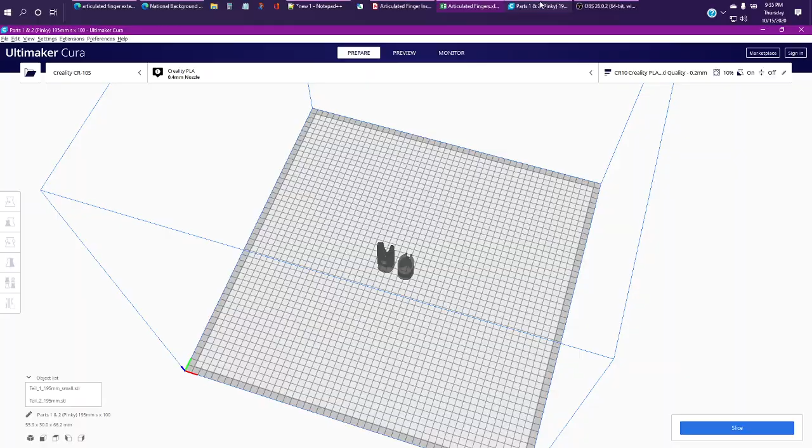Like I said, you're going to have to measure yours to get it to the right size, but otherwise that's it. Now, as far as making the pieces shorter, originally I was thinking you could just grab the z-axis and reduce it, but the problem is you see this angle right here — you need that for your parts to fit together.

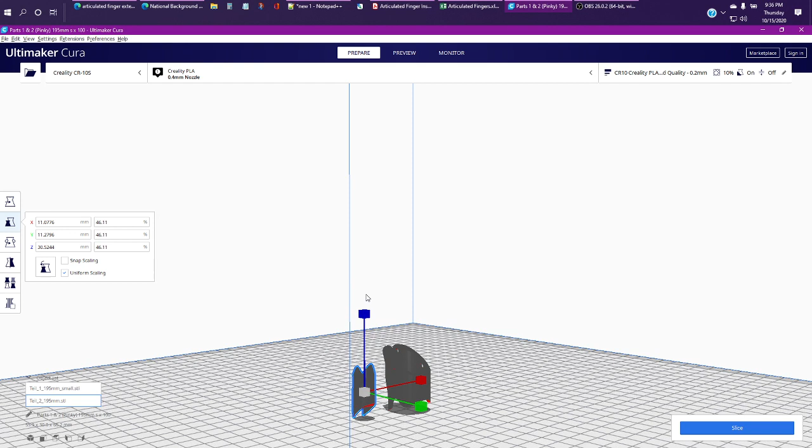If you take the z-axis scaling — oh, this is scaling, sorry — if I just take the z-axis and reduce it, then it changes that angle, and it also changes the holes on it as well. So you don't really want to do that.

So what I figured out was this: if you take the parts and import them into a 3D modeling program, and split them a certain way, you should be able to reduce the length of the fingers. So what I'm going to use here is Tinkercad.

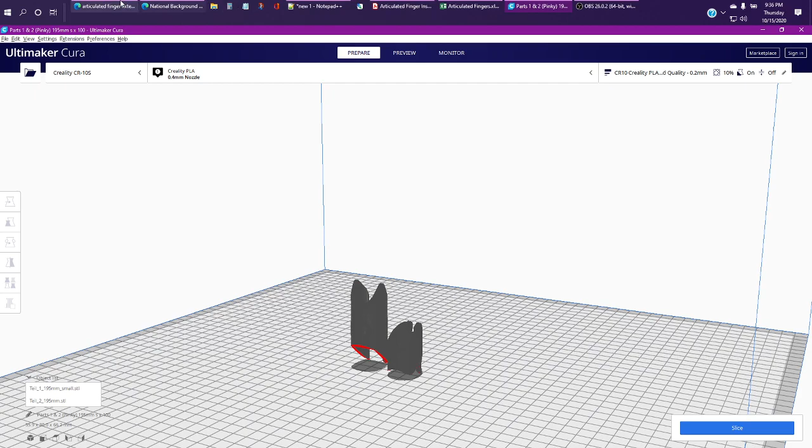And you can see I've already got part 2, part 3, which I'll tell you why I have that in there, and lever 2 in here. I'm going to go ahead and import.

So once you create your free account in here, you can just do drawings, and I'm going to go ahead and import the model file. I'm going to choose a file, and then go to parts 1 and 2, and import part 1. I'm just going to use the 215 for part 1. Doesn't really matter - it's whatever size you determine you need in order to make it shorter or whatever. Then I'm going to hit import, and it's going to bring it onto the work plane.

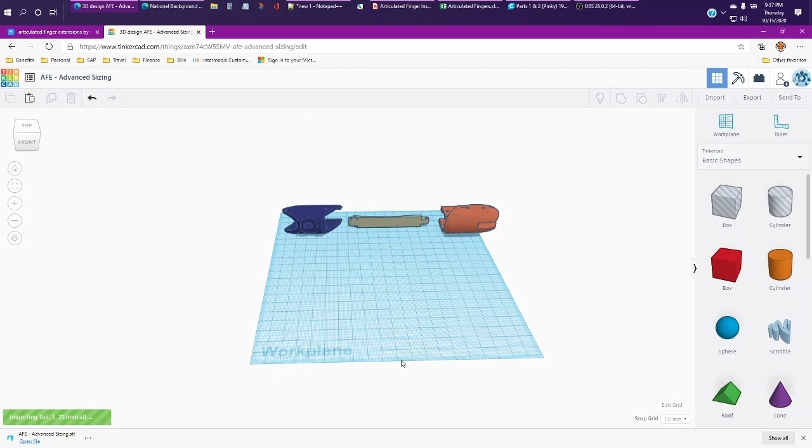Okay, part 1 is the only one that comes in the direction I want it to be, just standing straight up. So for the other parts, I highly recommend that you rotate them 90 degrees.

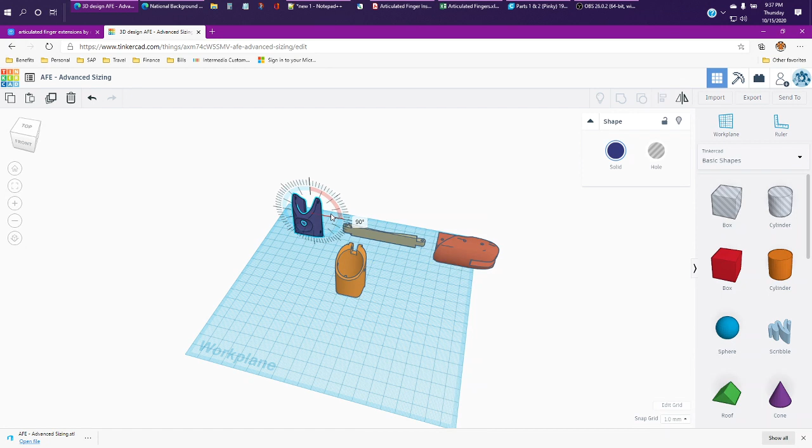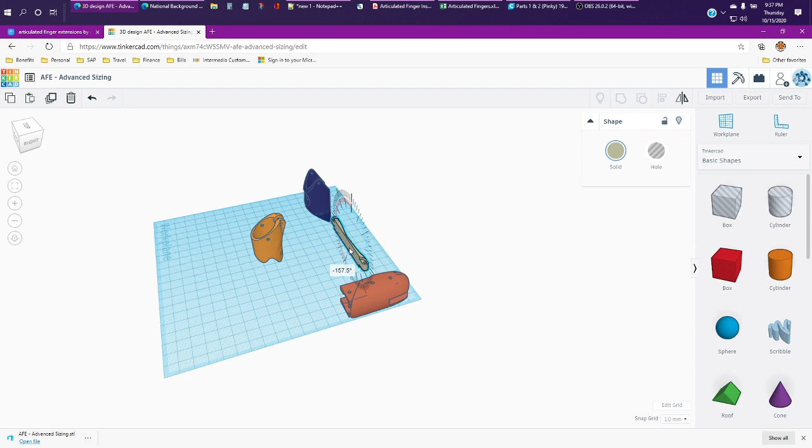Like this, let's say. Oh shoot. And this one, let's go. This one, I'm going to go ahead and rotate it this way so that it kind of fits with the other parts. Actually, let's see, let me go ahead and rotate it 90 degrees. Nope, other way. Because it's got to be - that's right. No, like this, yeah. It's going to end up being like that.

So I want to make sure that when I scale it as well, that it fits with the other parts.

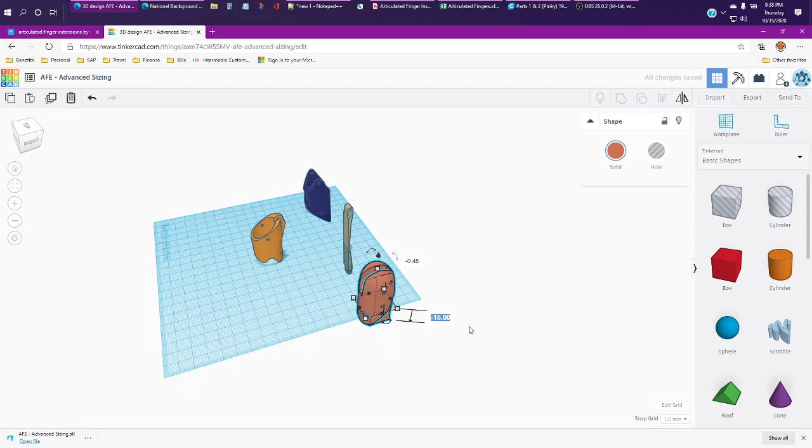And then I'm going to go ahead and move it up to the plane. And this one as well.

I'm going to change my grid to snap at 0.1 just because it gives you a little more precise control of the stuff. Might not be necessary, but it's just a little easier that way.

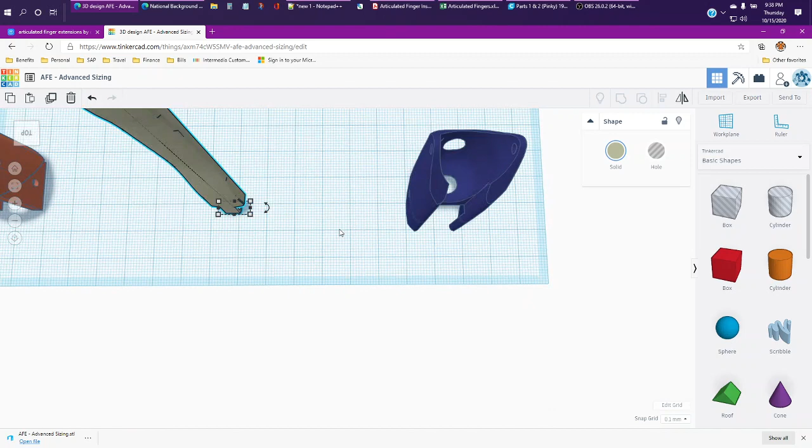All right, so if you only want to reduce part 1, that's going to be the easiest thing to do. The thing on part 1 is, since the holes at the top are the main ones, you have to preserve these, and then you need to preserve the angle of this slope right here.

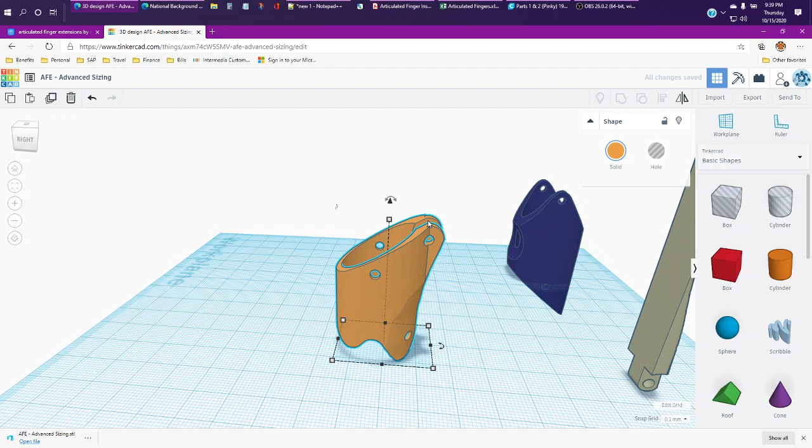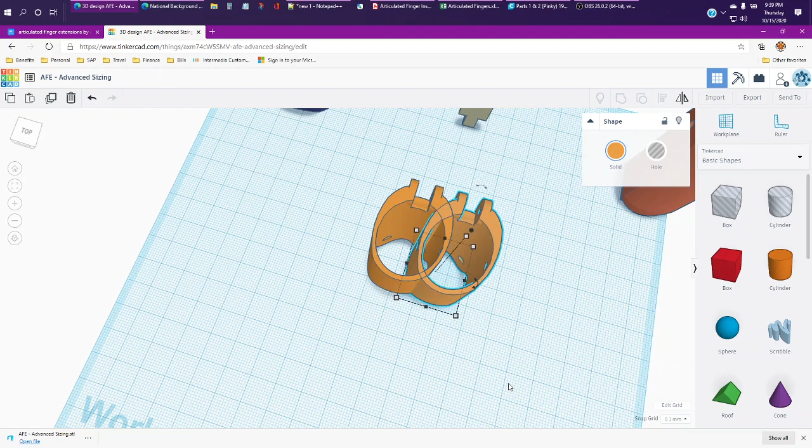So what I'm going to do is click on part 1 and duplicate it. And then I am going to raise - or you can do it either way - I'm going to take it, I guess I'll take it to the side. Come on, escape. There we go. Just to kind of get that copy out of the way.

And then what I'm going to do is grab a cylinder hole from the shapes, and I'm going to bring it to here, enlarge it, and lift it up.

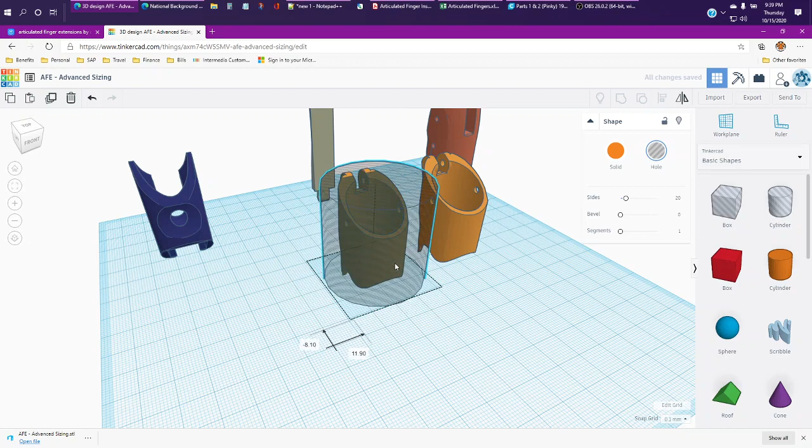Let's see - first what I'm going to do is figure out how tall this part is. So it's - oops, it's still the hole. Oops, undo. So I want to figure out how tall this part is because I want to know how much I'm taking off in order to cut it down. So it's 42.03.

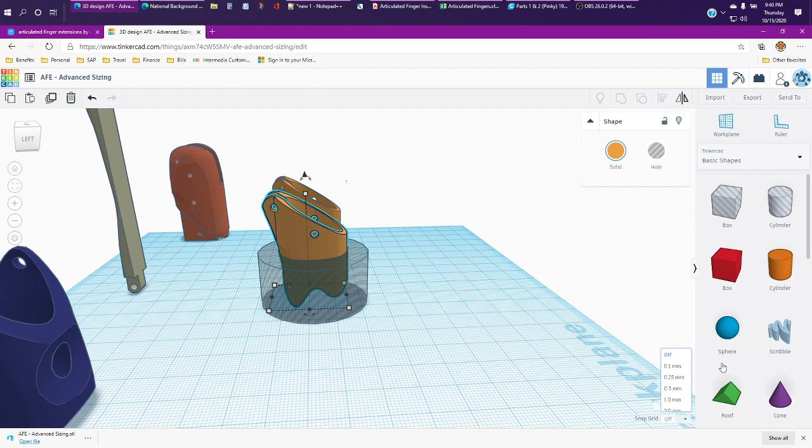So actually, I probably want to do my grid at 0.01, which is not an option, so we're just going to turn it off. All right, so 42.03 for the part itself.

So what I want to do is take this cylinder and make it also 42.03, so it's the same height.

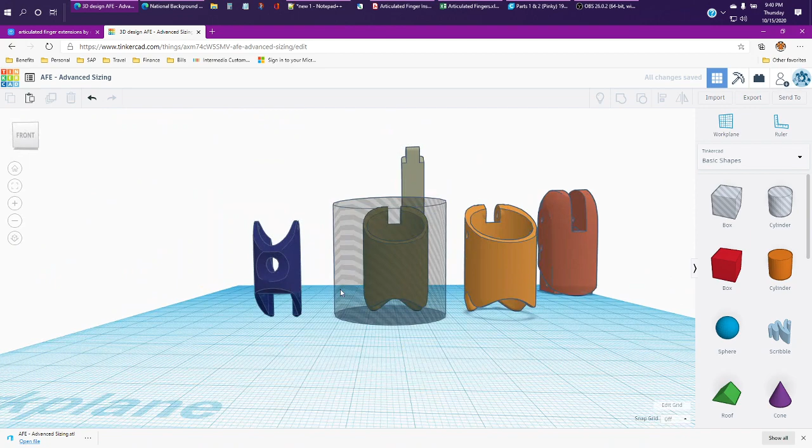Now, since the part I need to preserve is at the top here with the holes and with the slant, I am now going to look at it from the bottom, and I am going to reduce the height up to about the level I need. I'm going to have to eyeball this a little bit.

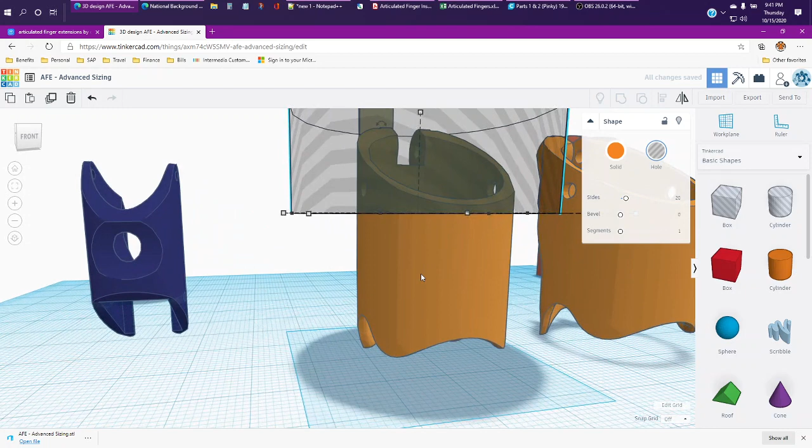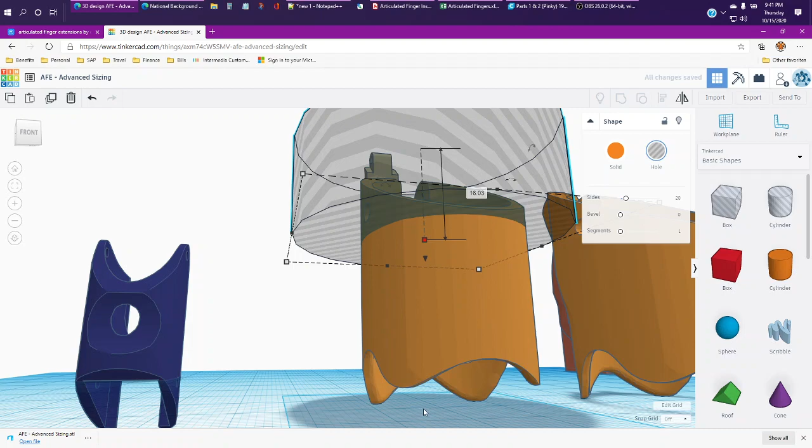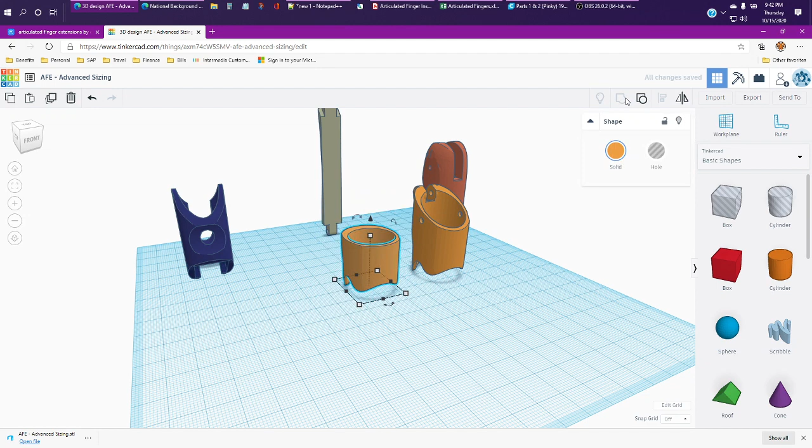Okay, so now I've got 16.03 I know I need to keep, or I'm going to take off of this one rather. So I can go ahead and group these two. I can group them, and that's going to remove the top piece for me. And I know it's taken 16.03 off of here.

Now I want to take another cylinder hole. I want to drag it over to this one, increase the size a bit. I'm trying to get it to make sure it's covering. And then the height was what? 42.03. All right, so I'm going to make the height on this one - oh, dang.

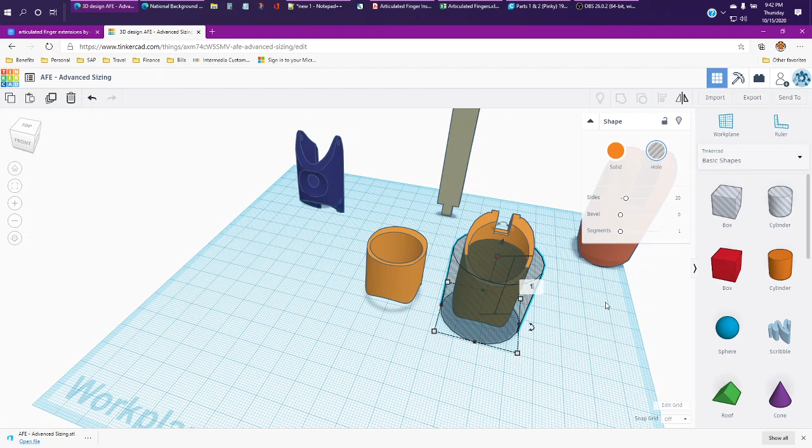All right, now I know that I've got, what was it, 16? Oh shoot, I forgot already. 16.03, yeah, that I need to take off the top. So what I want to do now is...

Bring this down, basically 16.03. And since I can't do math in my head... 26. All right, so 26.03 high it needs to be. Okay, and then I'm going to go ahead and group these two objects.

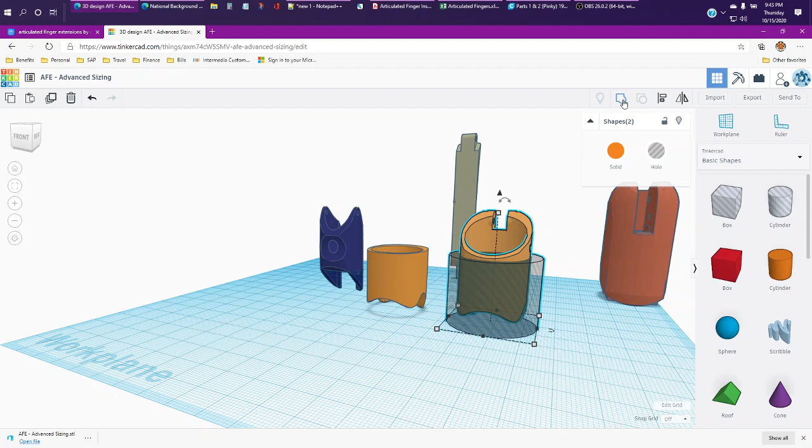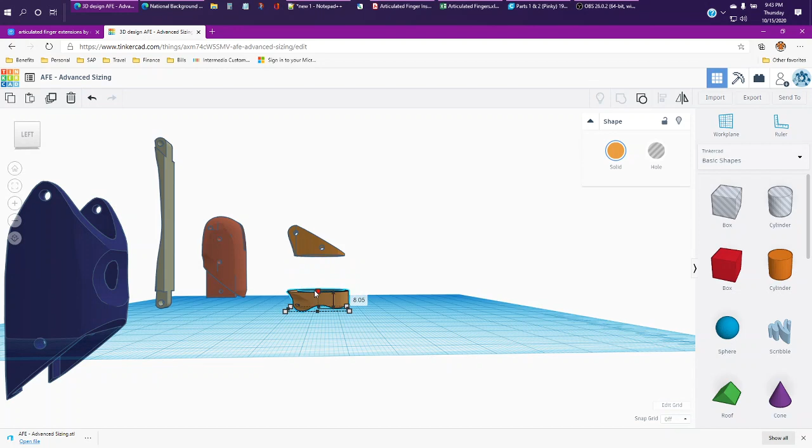All right, so now I've got basically the top and the bottom separated out. And all I need to do at this point is, if I want to reduce the size of this, take the bottom part, reduce the z-axis as much as I want to. We'll put it down to here. And this should preserve the shape of the circle and everything that's going to connect.

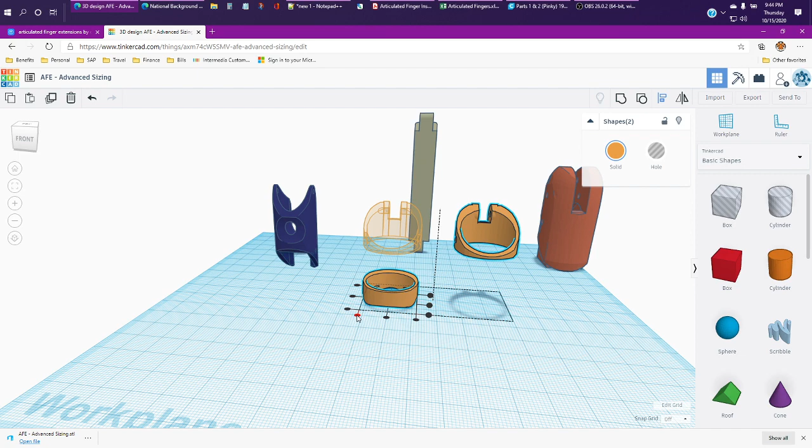So then what I do is grab this piece. And since I just moved it to the right, I'm going to grab this one also. I'm going to align. And I'm going to bring them to this piece, and I'm going to hit the left alignment so that they end up in the same spot.

Now, at this point, what I need to do is see how tall this is, which is 8. And I need to adjust this so that it's now 8 off the work plane. And if I've done it right, then I've got my...

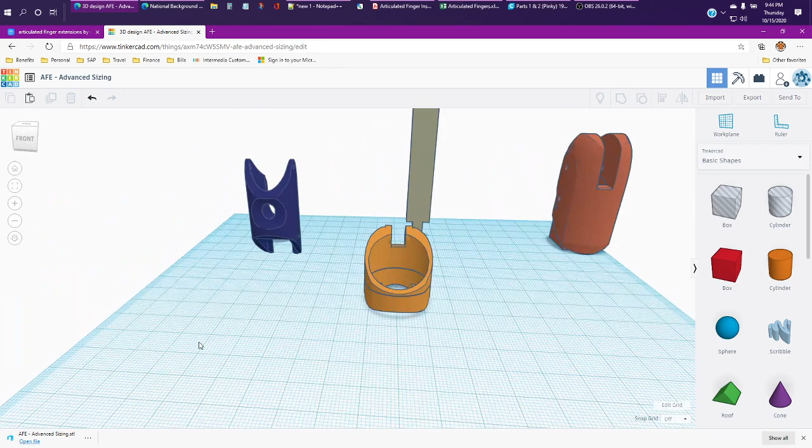Shorter version of the piece. This is a little shorter than probably you would use, but you get the idea. So then once I do that, I'm going to group these two, which will make them all one piece. Don't worry about this line right here. You won't see it in your print or anything. It's just the way Tinkercad works, I believe.

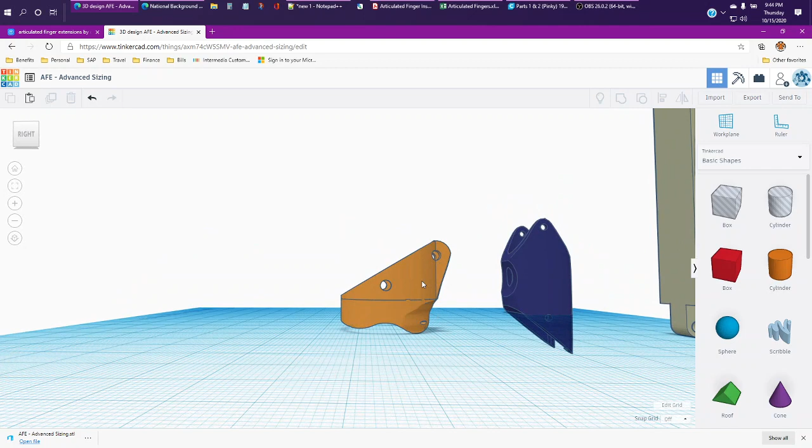So once I do that, I can grab this model and then export it as an STL file, and then it will allow me to use it in my print. So that's how you size part 1.

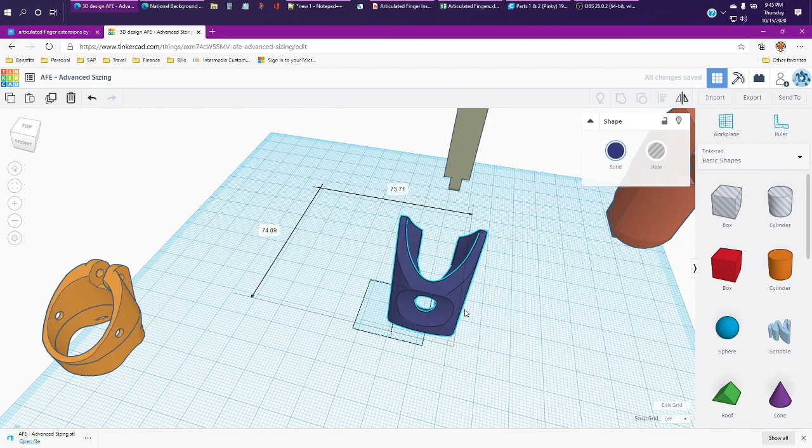Now, if you size part 1, that's all you need to do is size part 1. If you size part 2, it's going to be a different story and it's a little more difficult, but let's try that now. So if you're sizing part 2, you're going to have to do basically three copies of it, right?

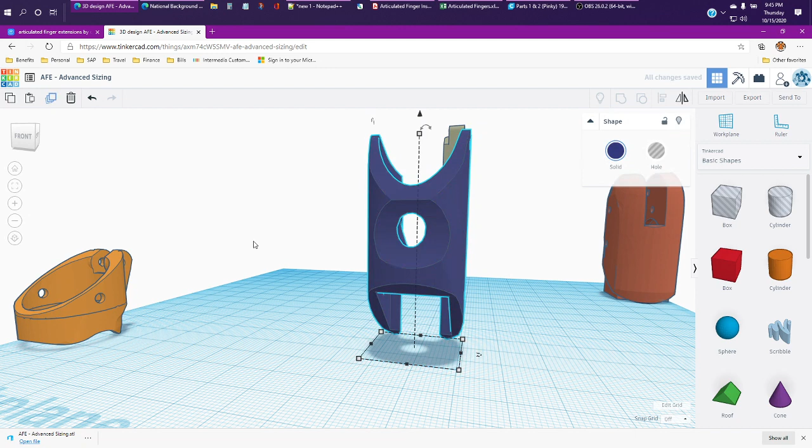So let's get this up to the workplane first. Oh, come on. Okay, bring it up to the workplane. We're going to go ahead and duplicate it. And I'm going to drag, and I'm going to pull that to the right. That's going to take forever, hang on.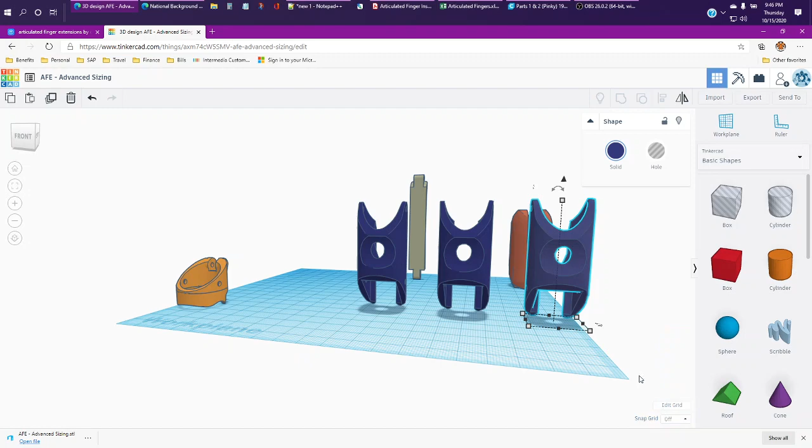Okay, pull that one to the right, and then we're going to duplicate it again, because we're going to need 3 different versions of it. Now I'm going to turn my snap off so I can do precise measurements.

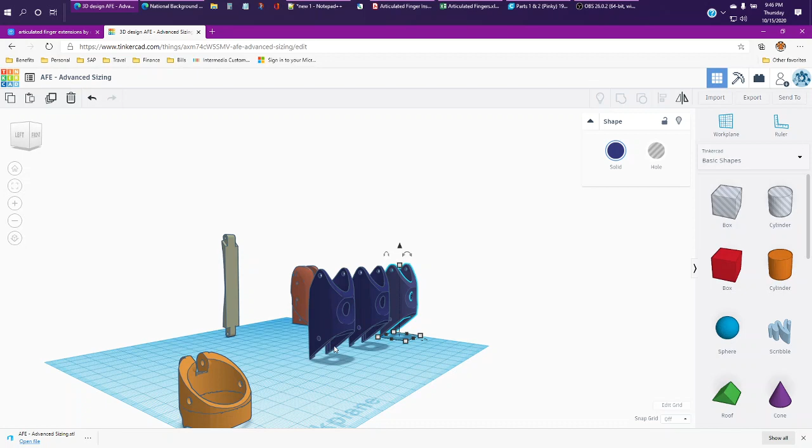So with part 2, there's a couple things that you need to do. First of all, you've got to preserve this part up here as far as the curves of this. You've got to preserve these holes down here and this slant right here so that it'll fit with part 1, or 3, I mean, I'm sorry. And then the middle part you can adjust.

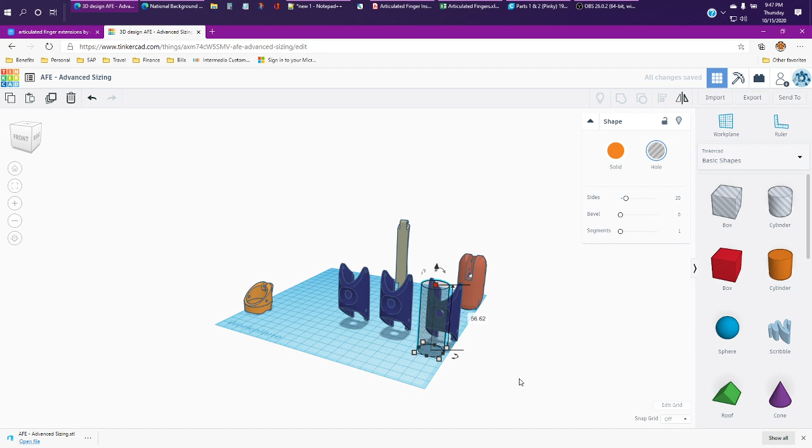So in order to do this, we're going to bring a cylinder out. I'm going to check the height of this, which is 56.62. I'm going to grab my cylinder. I'm going to make it 56.62. And then I'm going to expand the size so it fits over the part. Double check real quick, that looks good.

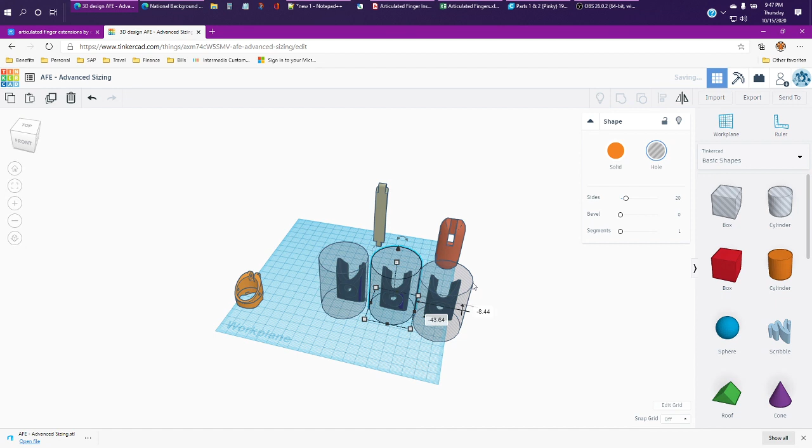All right, so let's go ahead and duplicate this cylinder twice. We'll go ahead and bring it over these just so we can use this in a second. So 56.62 high.

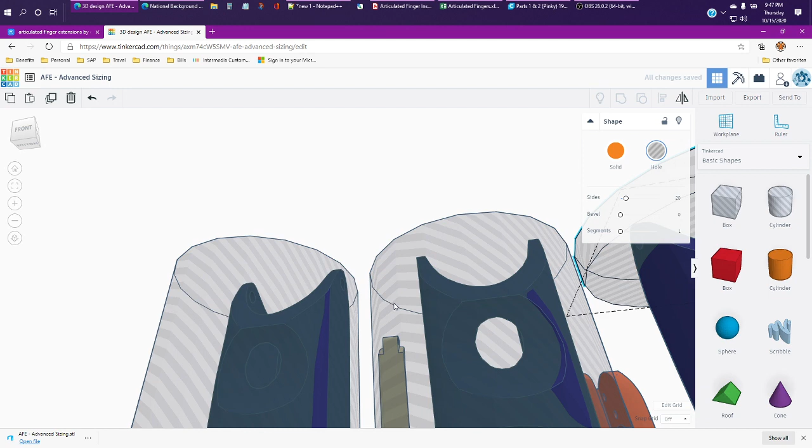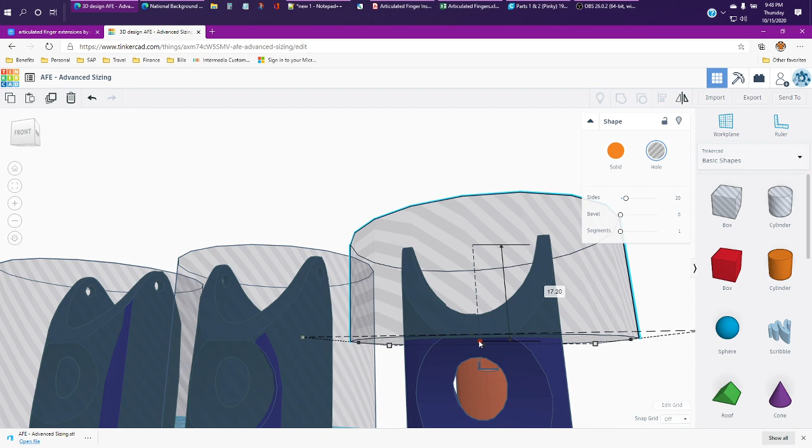So for the first piece, we need to do the top part, I guess is fine. So I'm going to raise this up until it gets to about where I want it. Now what I'm shooting for is this little line right across the top of the hole there. That's about where that slope ends. Maybe a little lower. There we go, that should be good. Maybe a little lower, yeah. All right, that should be about right.

And what I'm going to do is see how tall this is. It's 17.20. I'm going to cut the top off of here. So I'm going to group these two objects.

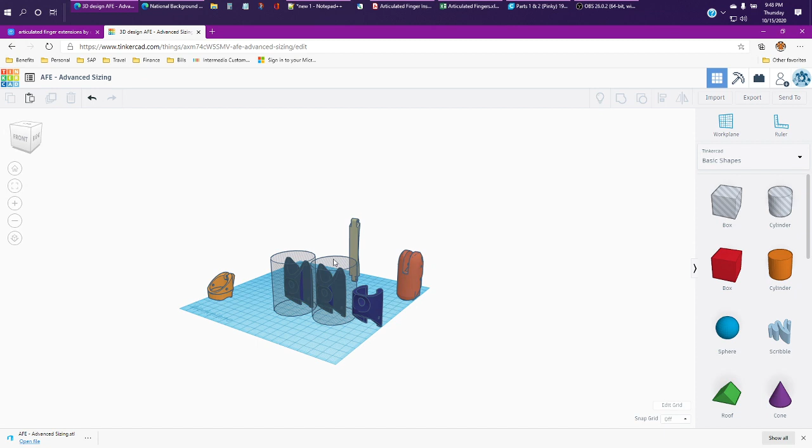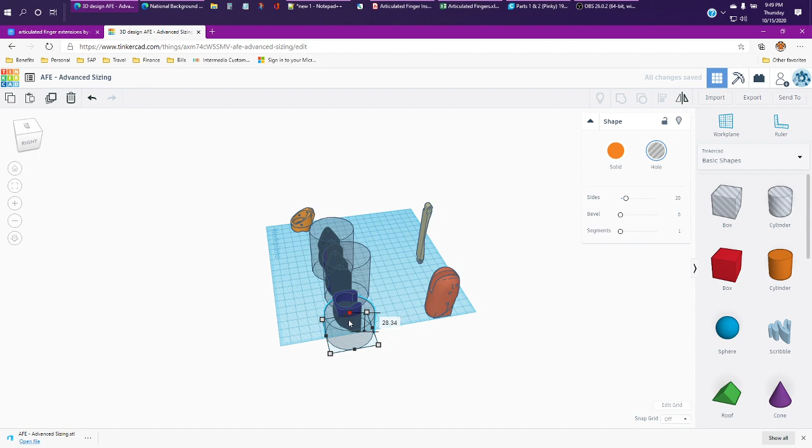I'm going to make one more duplicate of this cylinder, and then lower it down to about the level I want at the bottom. Now, again, I need to preserve this angle right here, so I need to bring this up just a touch. It's right at the top of that angle, which is good.

Now this one, let's say 28. I'm going to change that to 28.30, just for rounding purposes. Now I'm going to group these two.

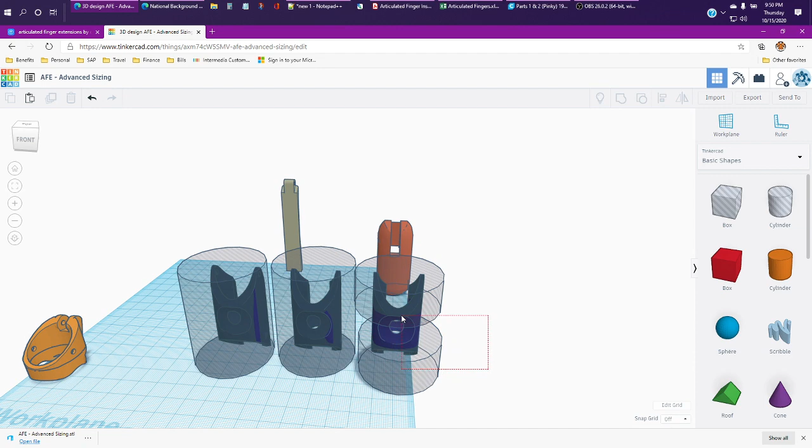Oops, sorry. That's all right, I'll just group them all at once. Okay, so now I know I'm 20.30 from the bottom. I am 17.20 from the top, and now I need to recreate those pieces.

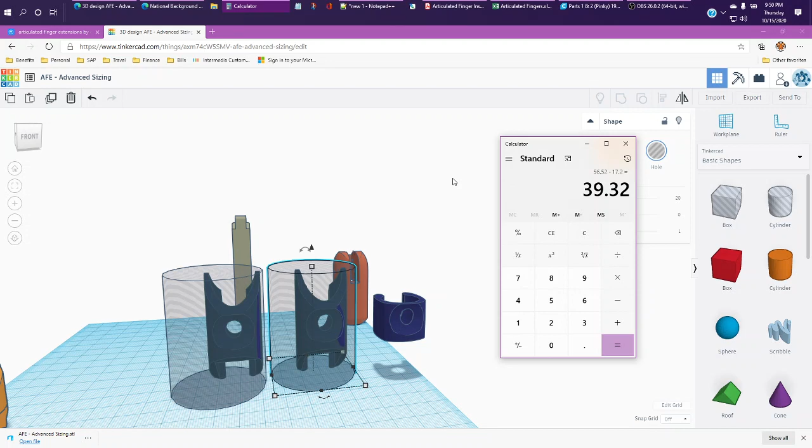So this one is 56.52 tall. Calculator. I'm going to subtract 17.20. Oh shit. That gives me 39.32 tall.

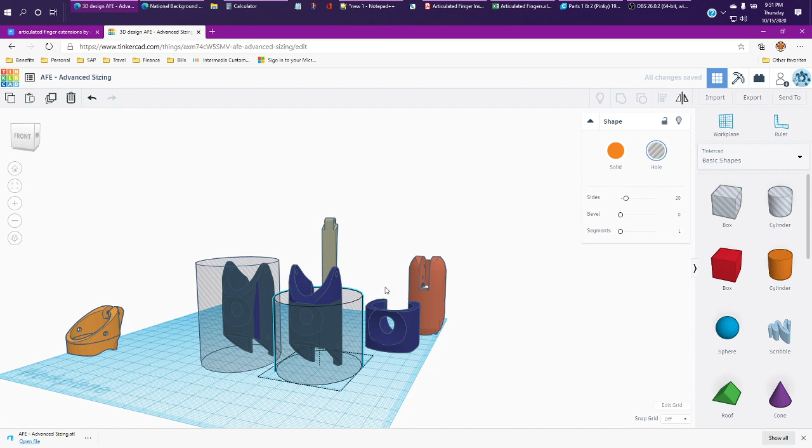So then I'm going to group these two, which gives me my top part. Oops, messed that up. Undo. Okay, so there's my top piece.

And then over here, move that over some too, so it's covering everything. Good, good, good. All right, so from here, I need to go

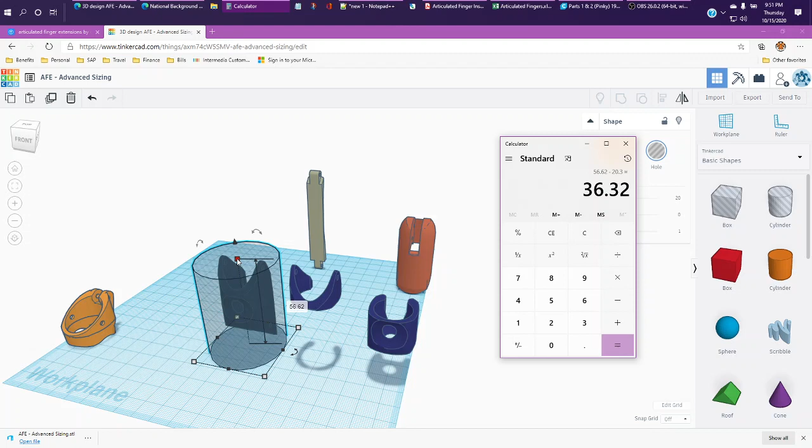20.30 up. So if I do 56.62 minus 20.30, that's 36.32. So oops, let's go from the bottom. I want to make this 36... what's it? 36.62. Yeah, 36.32.

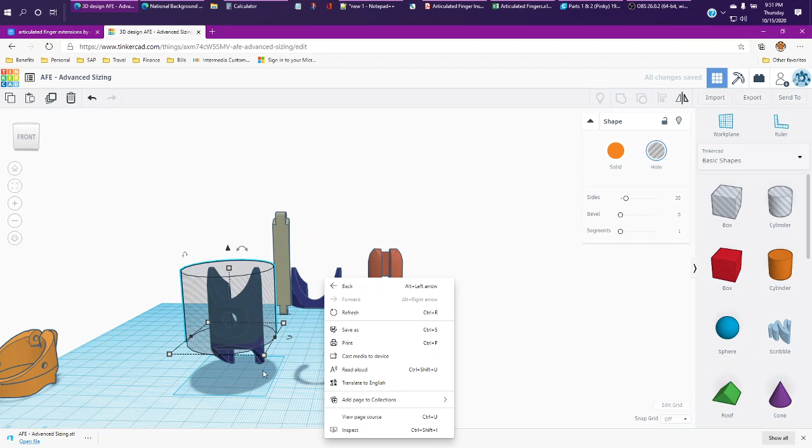And then now we want to group all of these parts together. Boom. Okay. Now we've got the top, bottom, and middle.

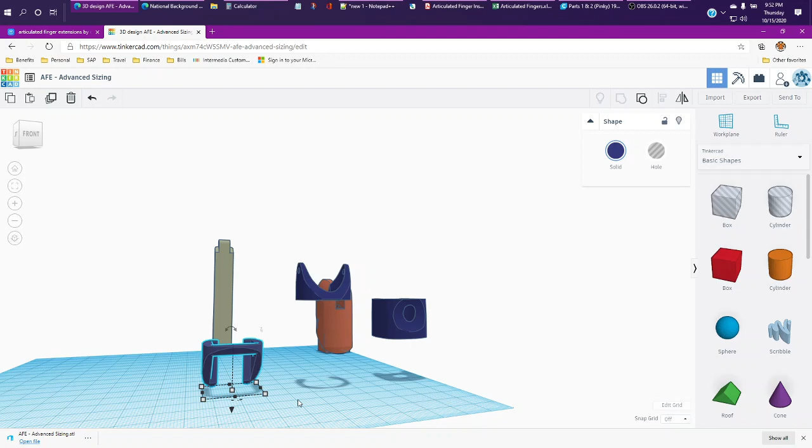The only part you can shrink, of course, is the middle, because you've got to keep the top and the bottom the way they are for the holes. But you can make the middle whatever size you want to an extent.

Do keep in mind that your part 3, actually this is upside down too, I apologize. Part 3 has got to fit in there. So in order for it to fit, actually I have to reflect this

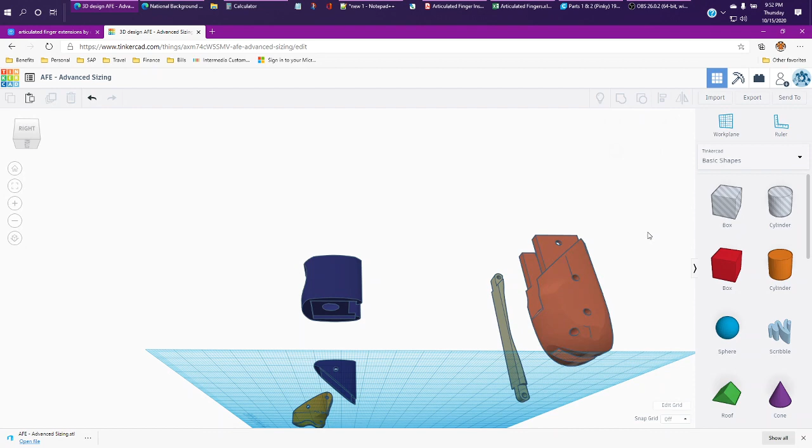way. Yeah. All right. So it should be okay because it's basically right there where the holes are, but you just need to make sure after you put it back together that everything fits.

So what I'm going to do now is I'm going to reduce the z-axis. It's at 1911. Let's move it down to like 983 or something like that, right?

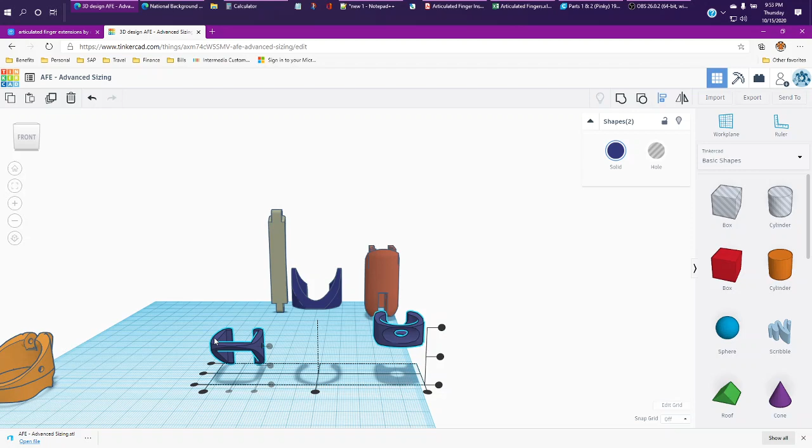Now, since I reduced this to this size, let's go ahead and grab this. We're going to align based on this part to the left and there. So you can see I've got my middle piece, and then we're going to align this and this based on this piece to the left.

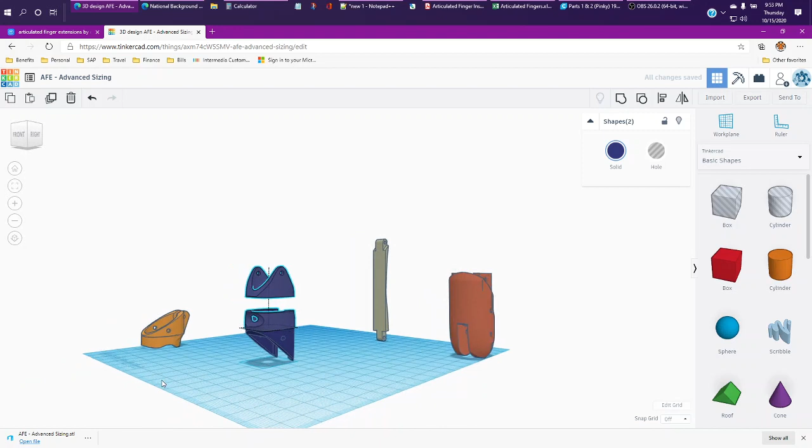Okay, so now we got a gap because we made it shorter, so we got to look at the heights again. So this is 20.3. This is now 9.83. So if I do 20.3 plus 9.83,

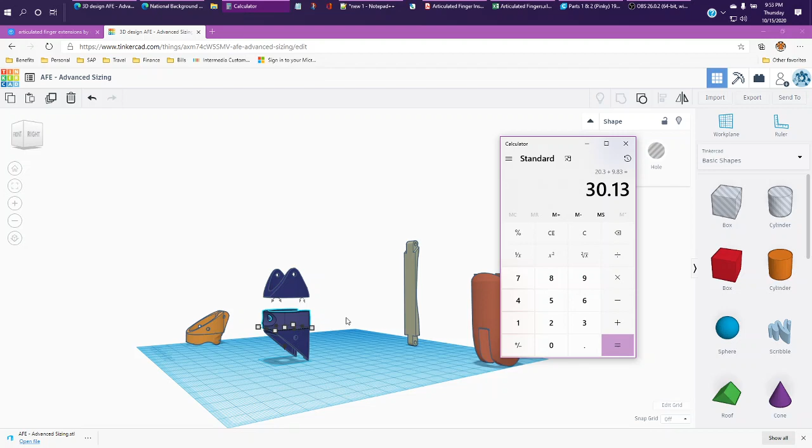it's 30.13. So I know at this piece I'm going to grab the little move thing, and then I'm going to go 30.13. That should put me right on top, and the parts should still match up together because they're still the same X and Y. You've only reduced the Z on this piece.

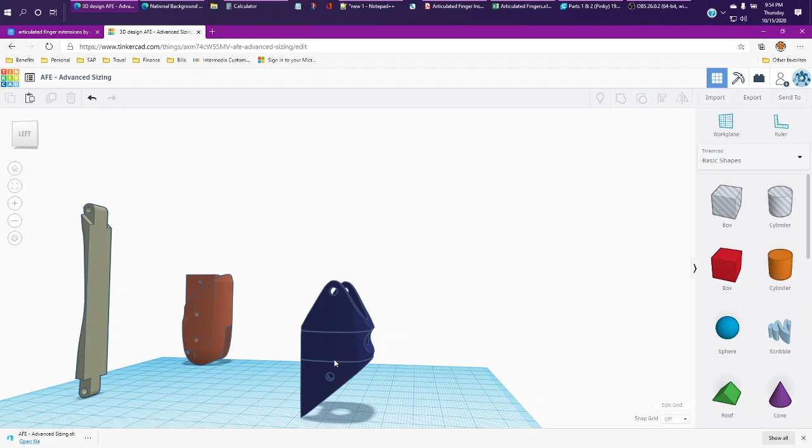So what I do now is I would group these together and go ahead, that way I can - oh shoot, I grabbed the wrong part. These together.

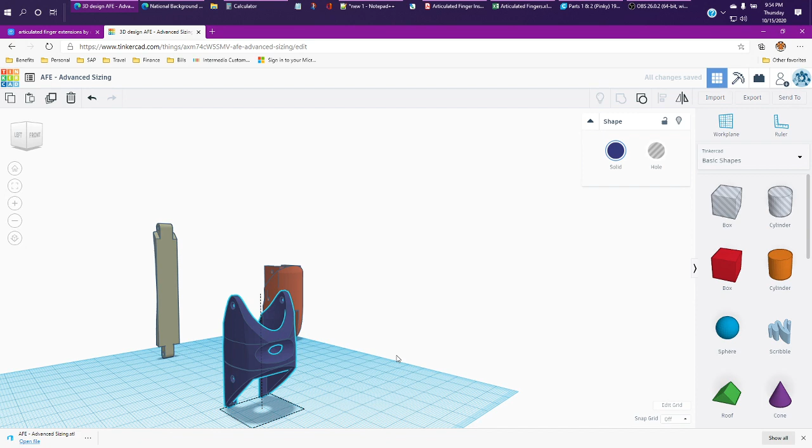Now, the only thing I would do now is to make sure my parts fit. So I'm going to bring this up. Oh shoot. Kind of match them a little bit.

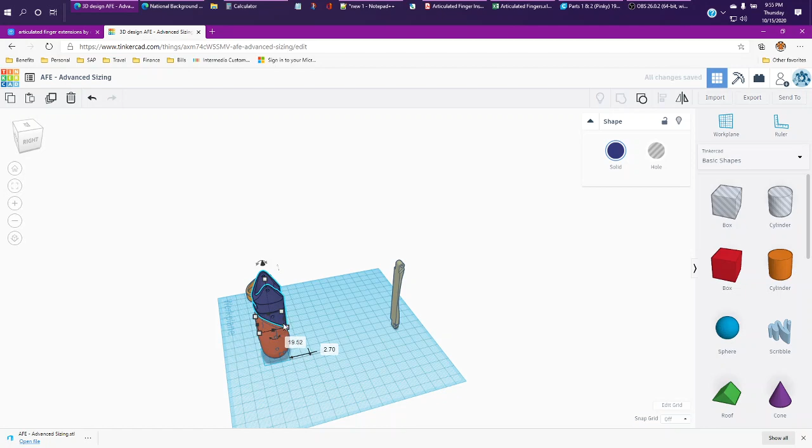Go ahead and align these on the left or something.

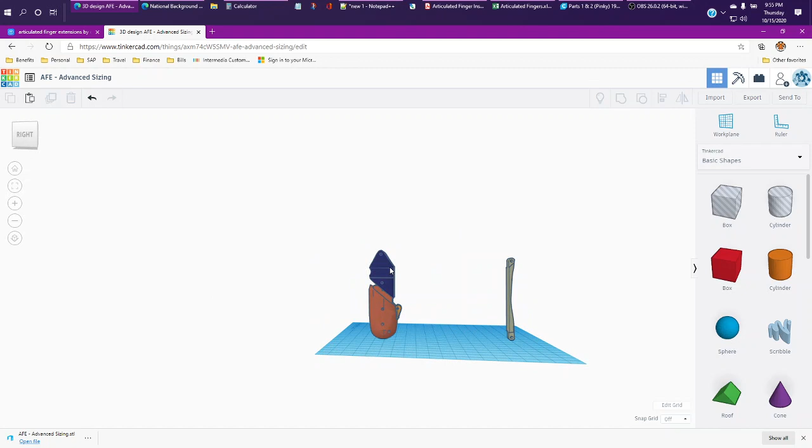Now I should be able to pull this down so it fits in. So what I'm looking for here is to make sure that inside of part 2, that part 3 still fits, which it looks like it's fine.

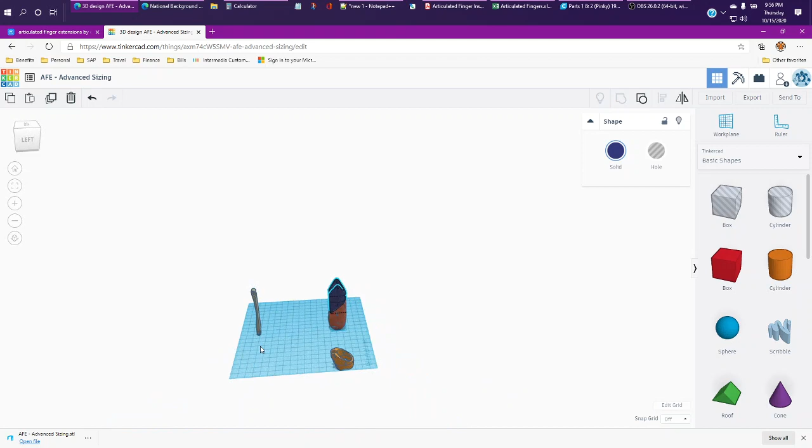Once I do that, you might need to align this lever depending on how much shorter you made it or whatever. You may not need to, or you could always try using the 62 millimeter. If you do, basically you're just going to do the same thing. You're going to cut the holes off the top, cut the holes off the bottom, and then cut the middle and shrink the middle and put it back together. Same way I just did with part 2.

So that's really basically it as far as how to shorten the parts in order to make it fit a little better.